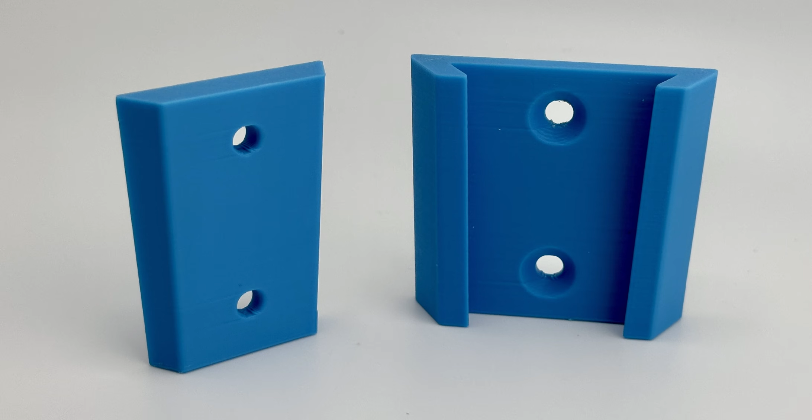In today's video, we are going to do a subscriber request. I had someone comment on one of my last videos that he needed help making a sliding dovetail, and the type he's talking about is one that locks. The dovetail itself is tapered, so he can use it as a wall mount. There'll be a female piece and a male piece, and they slide together and lock together. That's what we're going to make today.

It's pretty simple. You just need to know a few tricks, and we'll take you through the basic steps, and then maybe we'll try to finish it off with some screw holes and stuff like that. So let's get started here.

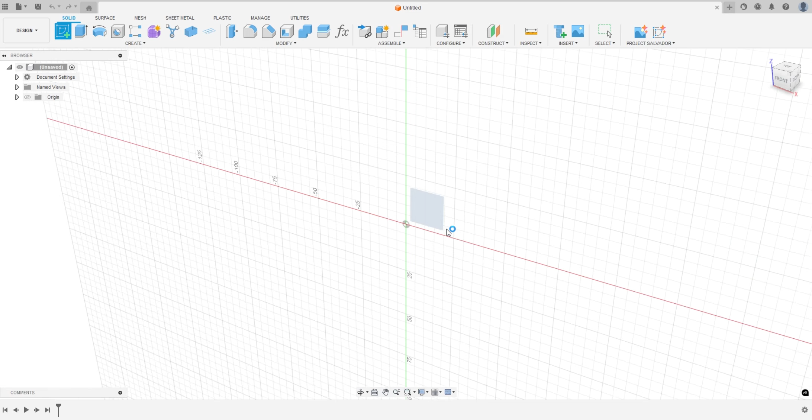The first thing we're going to do is create a sketch on this front plane, and we're going to drive this entire model with just one sketch. There's many ways you could go about making this model, but this is just the easiest way I could think of. So let's hit R for rectangle, and I'm going to do a center rectangle.

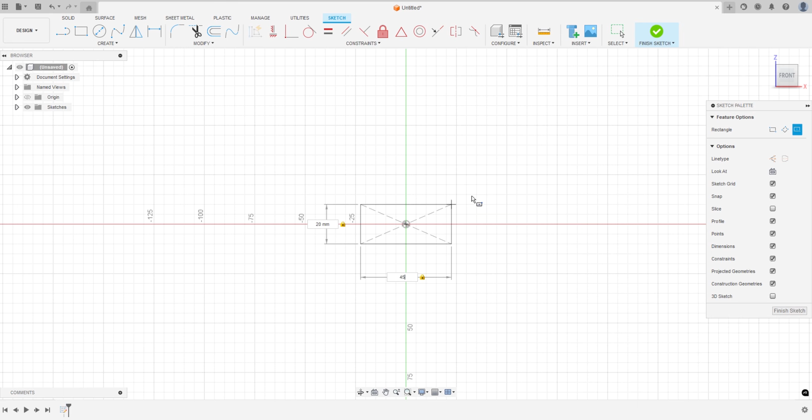We're going to click on the origin, and we're going to cut this rectangle in half, and I want each half to be about 10 millimeters thick. So I'm going to make this 20 by maybe about 45. We'll go 50, so about 2 inches.

Then I'm going to draw a line. So L on the keyboard for line. I'm going to snap to my center point, which has that triangle show up. Click, drag, and click at the other side. So now we have two rectangles.

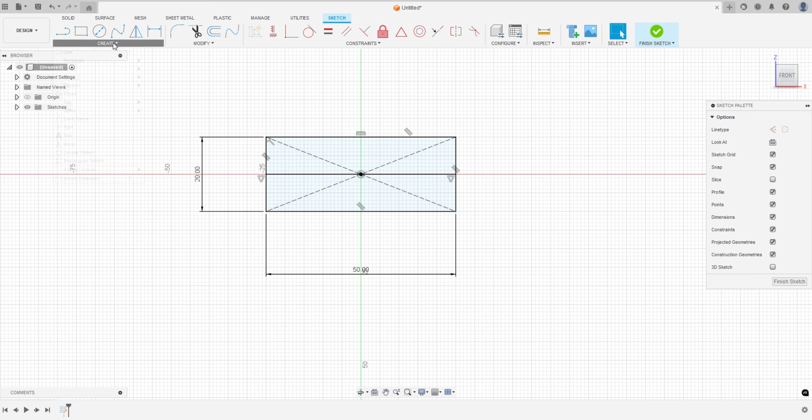Now there's a few ways you could do this. If you don't need to be very precise, because the next thing we're going to do is basically make the profile, the dovetail shape here, you could just make a triangle. So you could go up to polygon, pick one of these, click somewhere in here and hit tab for the sides. It says 6 right now, and you could go to 3.

We'll turn this way, and you could literally just drag this out however you wanted it. And honestly, that looks pretty good. So I just might do this.

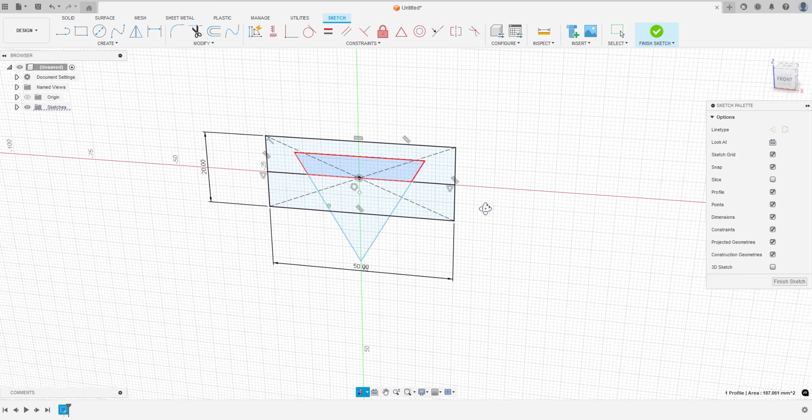So now we have this nice dovetail shape, and we don't have a constrained sketch, which normally for such an easy model I wouldn't worry about, but you should get in the habit of constraining your sketch, because any unconstrained sketch always slows down Fusion, especially if you're going to do complicated models.

So that's pretty much it. Here is our entire sketch. Now there are lots of ways you could have drawn this sketch, right? We're basically looking to have 2 rectangles and then really a dovetail on the one side. This rest of this triangle right here, we don't really need.

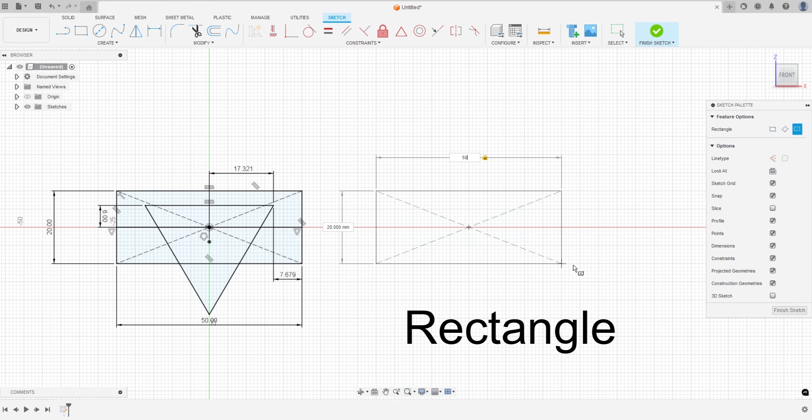If you wanted to have more control, you could do it a different way. So let's just say we redraw that square. I'm going to draw this line down the middle, and then I'm going to draw another line. First, I'm going to hit X on the keyboard to make it a construction line. And we could have just drawn our dovetail, or at least half of it.

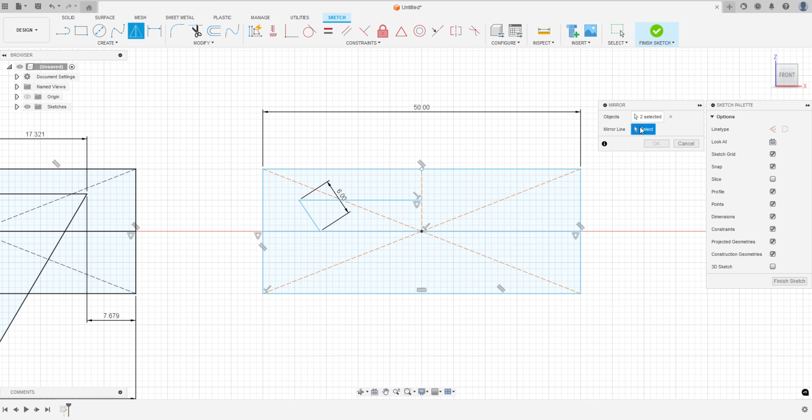Let's say we wanted to make a line like this, and we wanted it to be 6 millimeters here, and it doesn't matter what angle. Let's say we just wanted it to be this angle. You could type in your angle. We could draw that line here, and now what we could do is take this and mirror it along this middle line that we did. Okay, and now we have a dovetail drawn like this.

So like I said in the beginning, there's lots of different ways of doing things. I'm just doing it really quick, which is why I chose to do this triangle, because it's already got the angles and everything. But just know that you can draw the sketch really however you want.

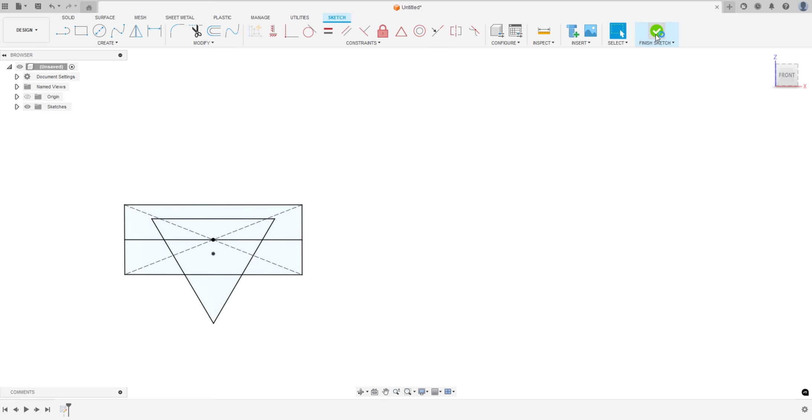So I'm just going to delete all this, and let's finish sketch. Okay, so we've got our sketch here, and the first thing we're going to do is select the entirety of that bottom rectangle. I'm going to hit E for extrude, and let's just extrude it, I'm just going to type in 50 millimeters and hit OK.

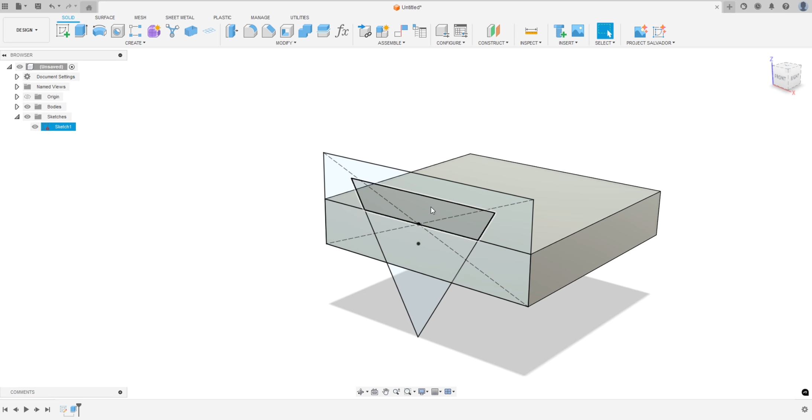Now this next step is really the hardest part, the part of making this dovetail, and that's extruding the dovetail itself. So I'm going to select that profile, hit E for extrude, and just click on the back of this. That just tells Fusion to extrude it to this surface.

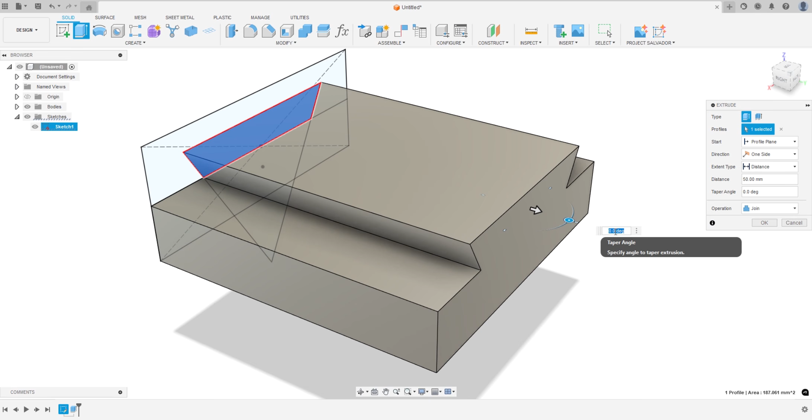And now before I hit OK, what I want to do is taper it. If you look at this window here, there is a taper angle. You can also do it manually with this little handle right here. So if I click that handle, I can either drag it or just type it in. So I'm just going to type in 1.5 degrees, and maybe let's go 2 degrees.

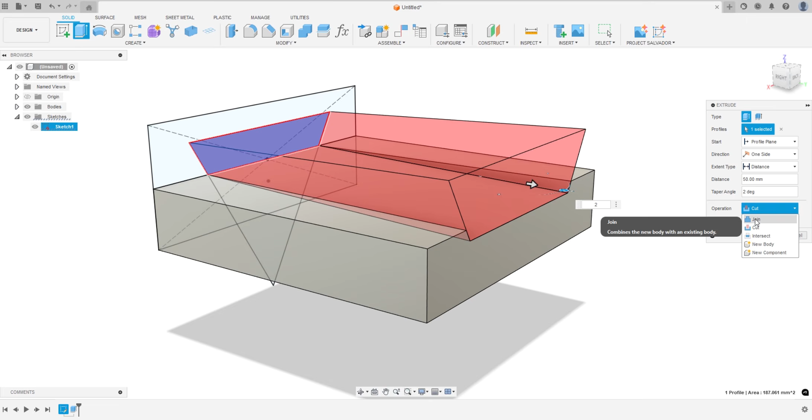And now you see how it turned red. That's because this side got bigger. So it extruded here and it tapered at 2 degrees. The reason it turned red is because it's digging into this other solid body, and we actually want to join this. So we can hit OK.

Now if I toggle off this sketch, you can see we now have a nice taper. Let's get our camera view. So now we have the small side and the large side. And now we need to create the other half of this.

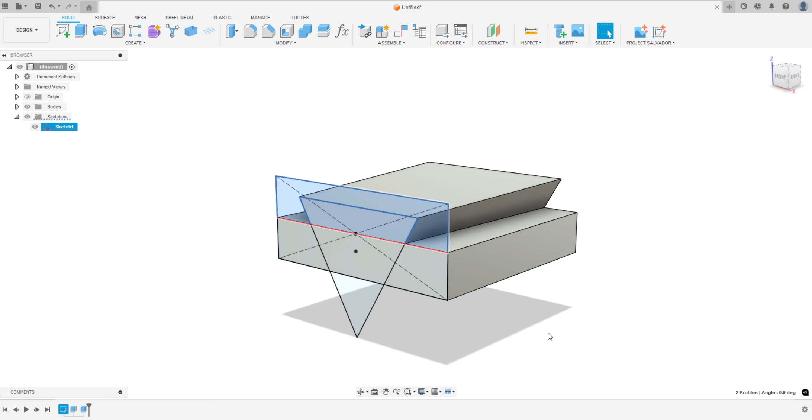So let's turn that sketch back on. All we need to do now is select the entirety of the top rectangle, hit E for extrude, and we're going to click the surface again. You notice it's trying to cut because it's running into that solid body, but I'm just going to go to new body and hit OK.

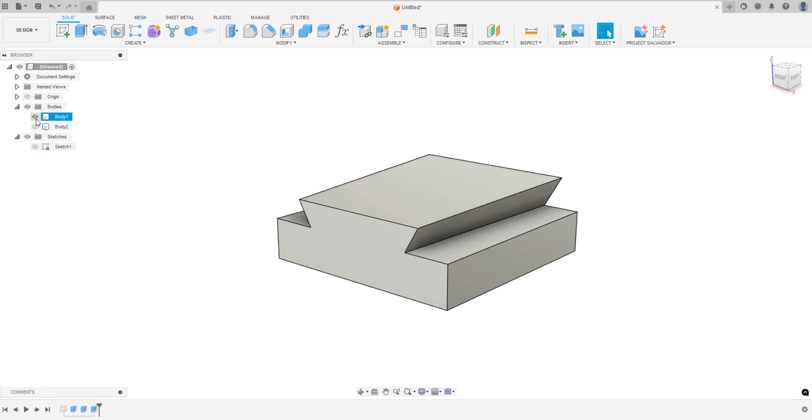Let's toggle off this sketch. So now we have two bodies. We have the first body with the dovetail, and then we have the second body that is just a box right now. So what we want to do is cut away this first box from the second box.

So we're going to do that with the combine tool, and we want to make sure operation is set to cut. The way to think about the combine tool, you've got a target body and a tool body. I really don't know why it's called combine—they really should change this name because you can join. Combine isn't even one of the operations; it's join and cut or intersect.

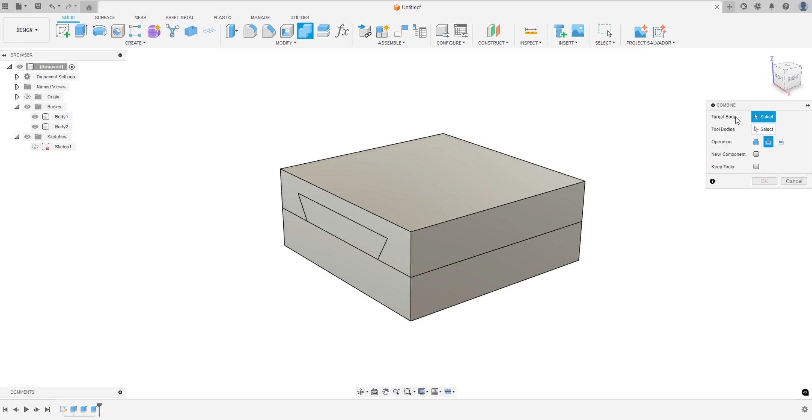What we want is cut. The way to think about this is the target body is the body you want to do something to—you want to cut away from something of that body, or you want to add something to that body. So the target body is that box. The tool body is either the cutting tool or the joining tool—this is what we're joining or cutting away from the target body.

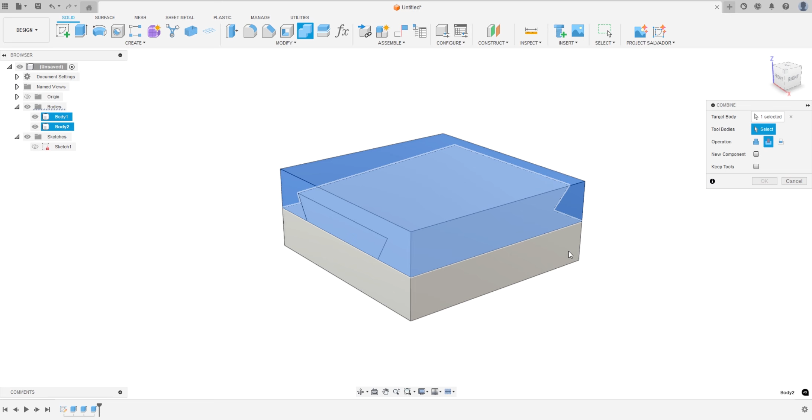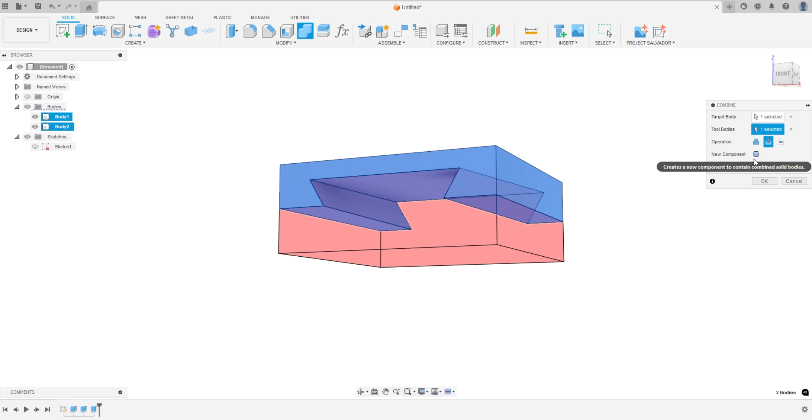So we'll select the tool body here, and it gives you a little preview. The tool body now turns red because red always signifies that it's cutting, and you can see the preview of it cutting into that box. The thing about the combine tool is it gets rid of the tool, so unless you check this, the body right here will disappear. So make sure you keep this checked unless you obviously don't want the tool.

So we'll hit OK, and now you can see we've got our two bodies. We can hide that first body, and there you can see it cut away from that second box we made. So that's pretty much it for the sliding dovetail.

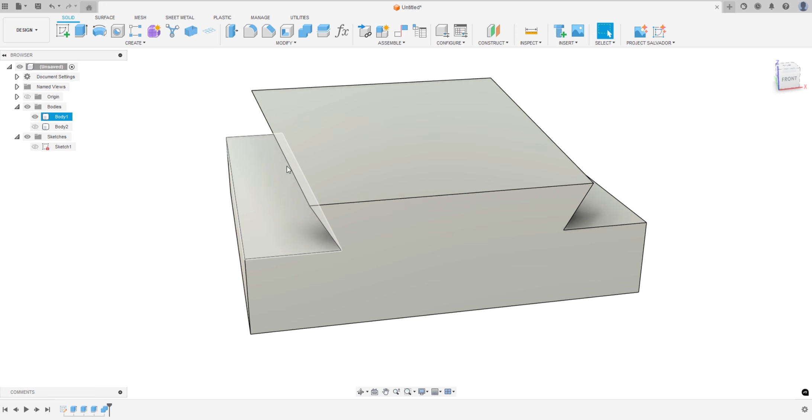The only thing you really want to do, that you really have to do, is taper these edges right here, because when this 3D prints, it's not going to print a nice sharp corner.

It's going to kind of be rounded and bulged out a little bit. So we want to make sure we go up to chamfer, maybe chamfer by like 0.3 or something, just enough to knock that corner off, so when this is sliding we've got some space here.

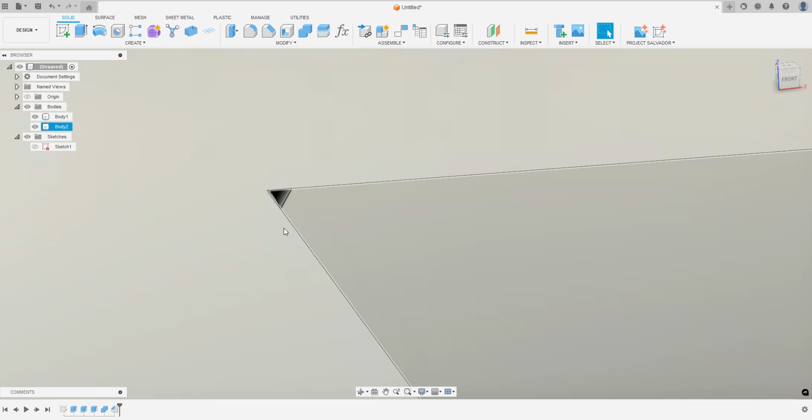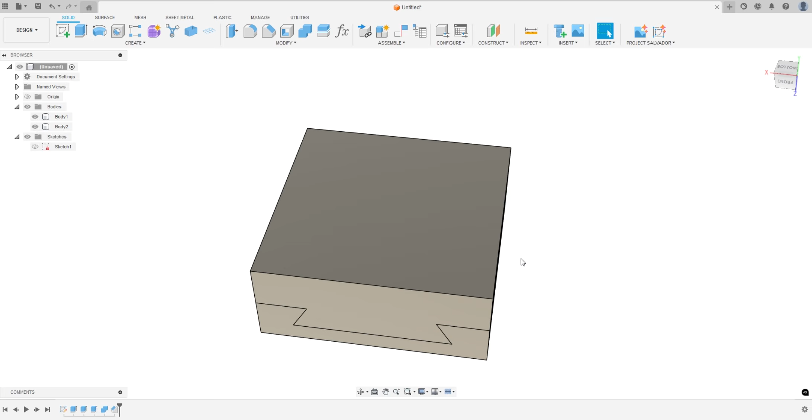The other thing you might think you need to do is actually create some clearance in here, but let's see if I can do this right. That's the big side, but let's see if we can figure this out. If I get my orientation correct - sorry. So like this, I'm going to hit move, and we're just going to move this body.

So you can see as this starts to slide in, it's got tons of room right here. As I slide this in, there's lots of clearance, and then that clearance closes till it gets to the end, and then it's a super tight fit.

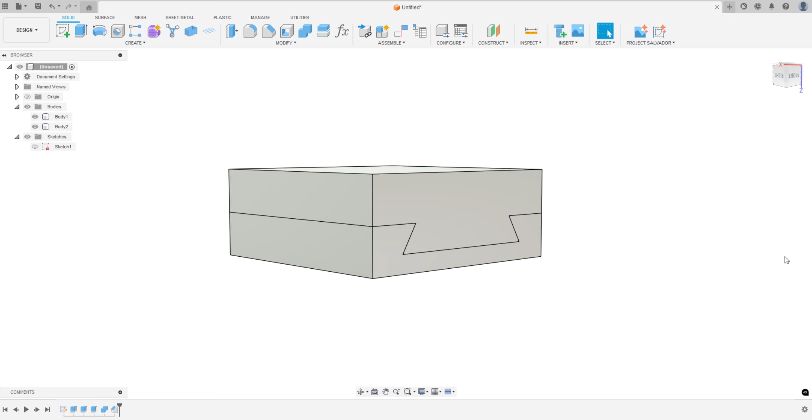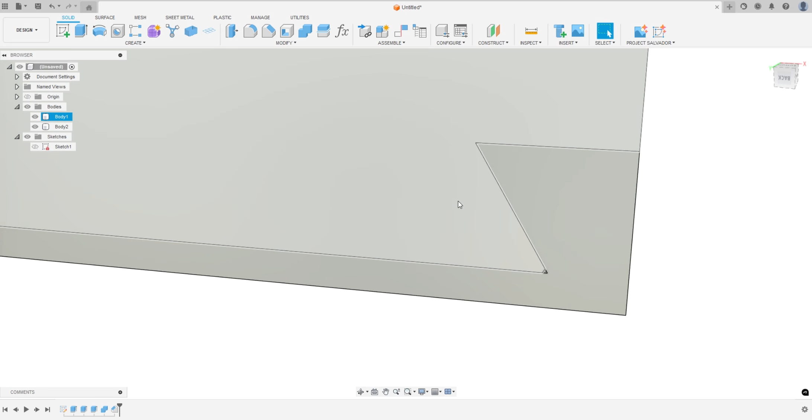So you don't really need to add any - oh, you know what, we may want to, I was just thinking we need to maybe chamfer this too, but the reason I'm not doing that is because we're going to finish this model a little bit. If you were going to keep this as a block like this, you'd also want to chamfer this edge. But enough talking, let's just keep moving here.

Okay, a few things we want to do. So this is the wall side, this is the top - let me get my orientation right here. This is the top. I don't really like how bulky this looks. I kind of wish this was angled or chamfered at the same angle as this.

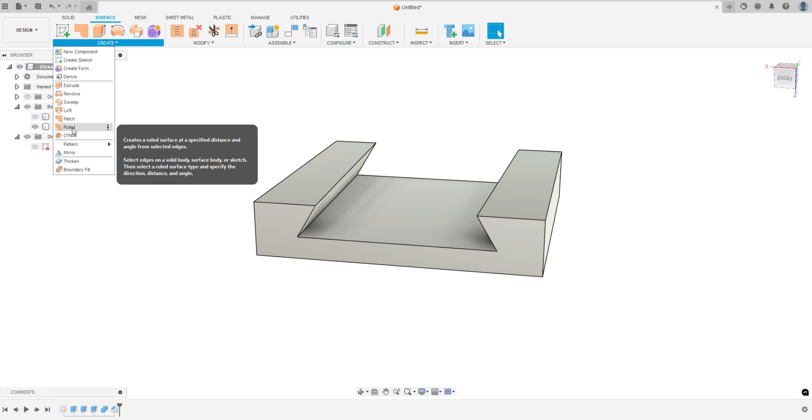We can do this in a really simple way that you might not think is obvious. You can go to Surface, and there's a thing called Ruled - I'm sorry, we're going to do Offset. Basically it's a way to offset surfaces. So I'm going to click on this one and this one.

And we're going to just drag this out maybe like 5. I think that's probably okay. And then we're going to hit OK. Now we're going to use these surfaces that show up right here, these surface bodies, to cut away from this body.

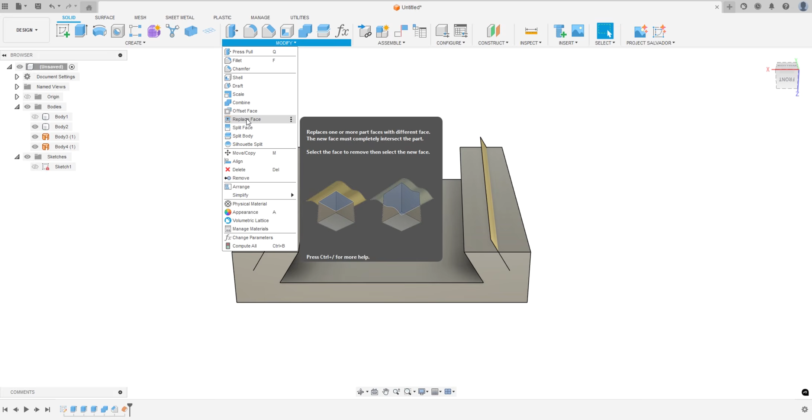So let's go back to the Solid tab. We're going to go to Modify, Split Body. So we're going to split this body, and our splitting tool is going to be this and this. And then we can hit OK.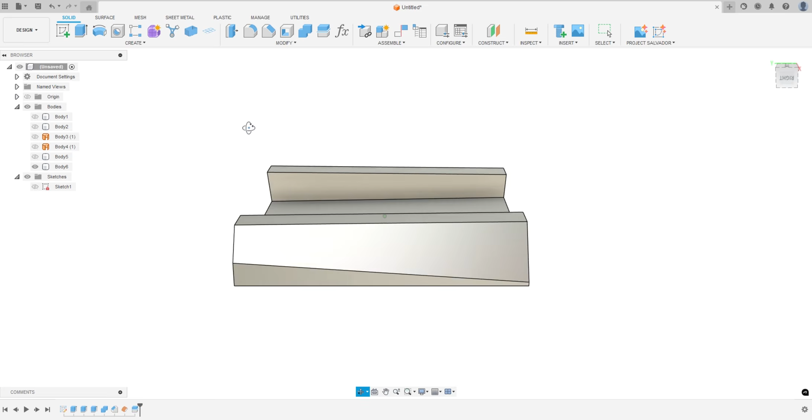And now we should have some extra bodies here. Let's figure out which is which. So this one is that side we cut. We can hide the surface bodies here. So now we have a cutaway that actually follows the chamfer, or I guess it follows this edge.

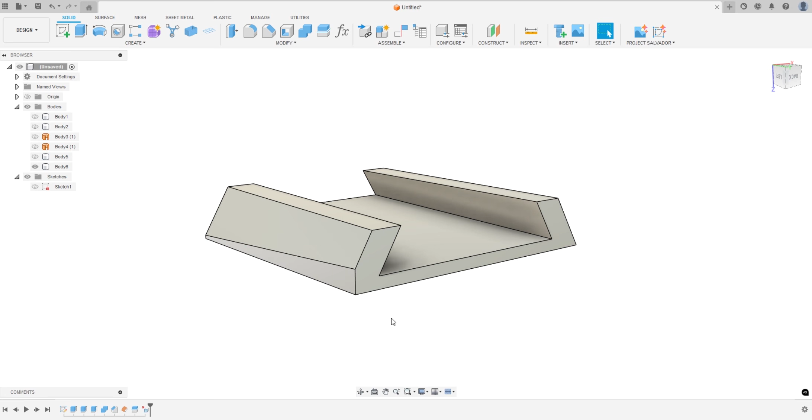Now we are left with kind of a funky edge here. This isn't the best practice, but you can actually just, as long as you're on the Solid tab, click this edge and hit backspace or delete, and Fusion will just fix that for you. It's not great really to do that on complicated models, but that's a way to just quickly get rid of that.

And maybe we want to just add a little thickness. So I'm just going to hit E for extrude and maybe extrude down like another 2 millimeters or something. Okay, so let's call that good for now for this part.

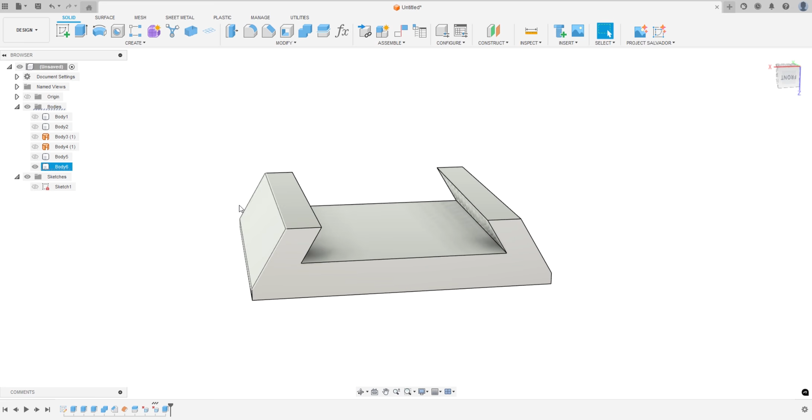Let's go back to the top. And first, let's do some cleanup. We're going to just hold Shift, click this body and this body, right click and remove. That's all that extra stuff that we don't need anymore.

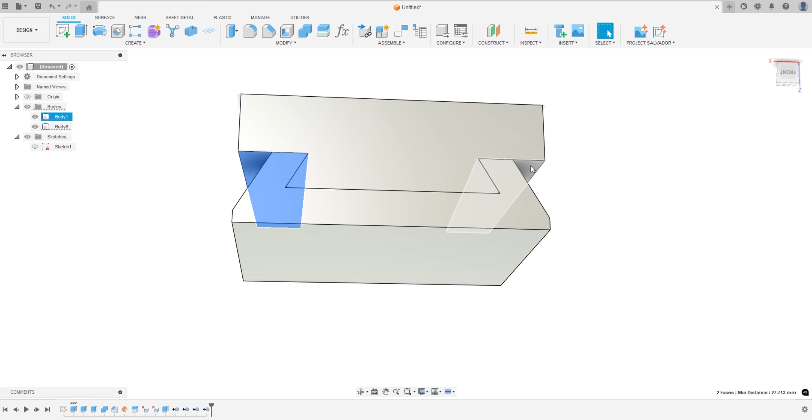So let's turn this body on. And we don't really need these big overhangs here. So I'm going to click on this surface, hold Shift, click on this surface, and I'm going to hit E for extrude, and I'm just going to drag that up to get rid of it.

And now let's see the distance here. So I'm going to click this, and we have a distance of 10 millimeters. So let's just extrude this down 9.5.

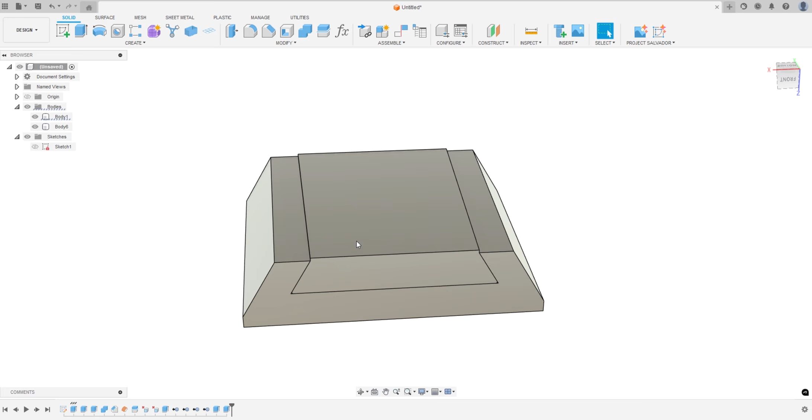That gives us about a 0.5 millimeter gap here so the parts don't rub. Whatever you attach this to doesn't attach to the wall part. Okay, that's looking good. What else can we do to this thing? Some screw holes. Okay, let's get out of here.

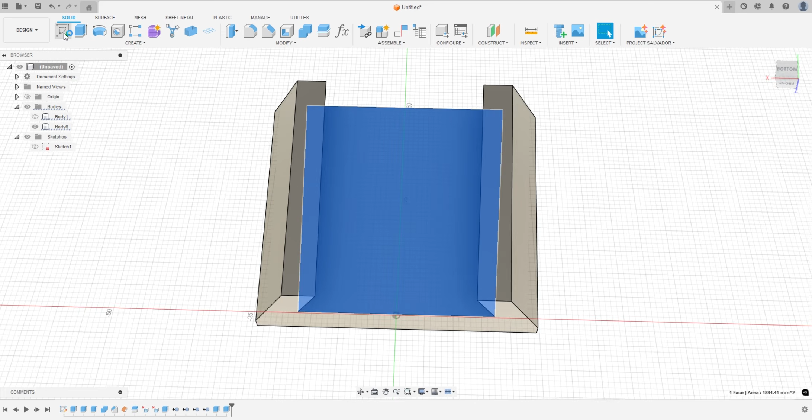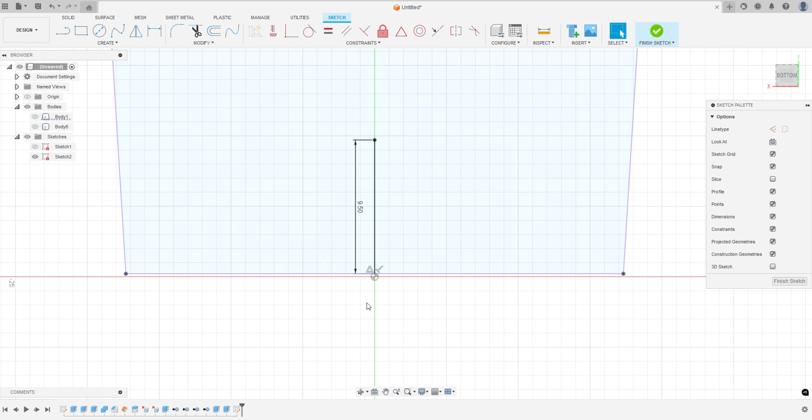Let's draw a sketch on this surface. I'm going to hit P for project, just to project that surface onto my sketch. If I hide my body, you can see we've got that surface projected. I'm going to hit L for line, and come down maybe, let's go 9.5. We'll do another line, make sure we're at 9.5. I'm making this up as I go—you can do any of this how you want.

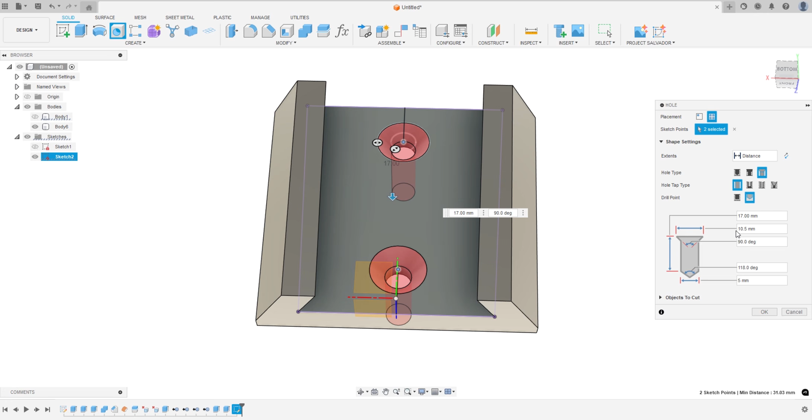Let's turn that body back on, and we're going to create some holes on these points that I made. Obviously, those are way too big. Let's change this to maybe a 5. Let's do a countersink, and we'll change this to 10.5 and hit OK. Of course, this will depend on the size of your screws.

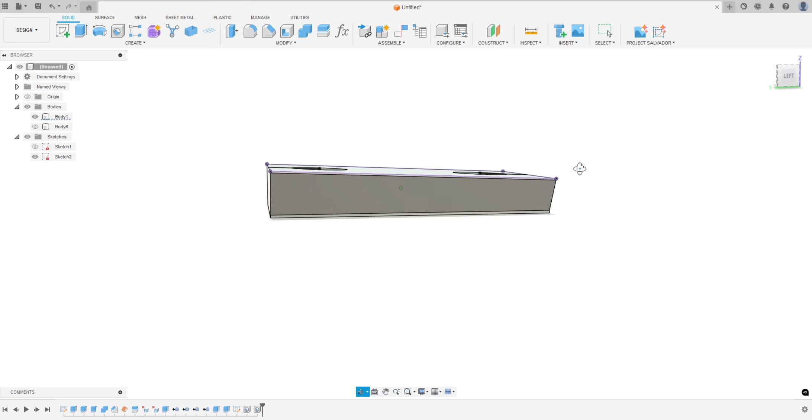And we can use that same sketch to do the same thing on the other body, so we can do more holes. It should save our hole size. Hit OK. So remember, this will get attached to your part that you want to hang on the wall, and this gets attached to the wall itself.

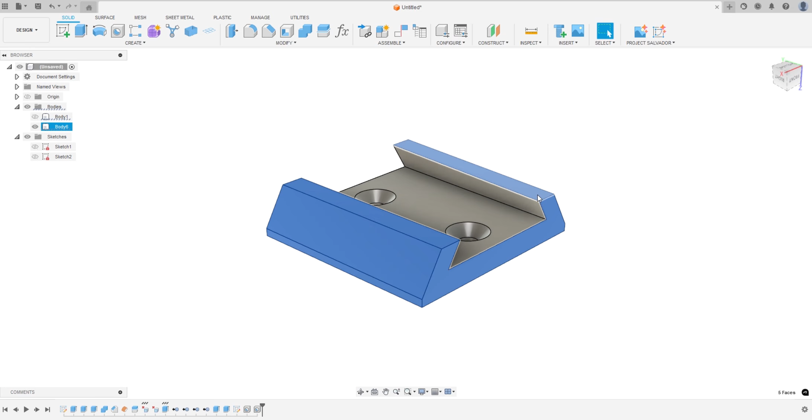And there you go, there's your sliding dovetail. Now, the only thing you might want to do here is chamfer some edges and stuff. So I guess I don't necessarily want to chamfer this edge, but let's just see what it looks like.

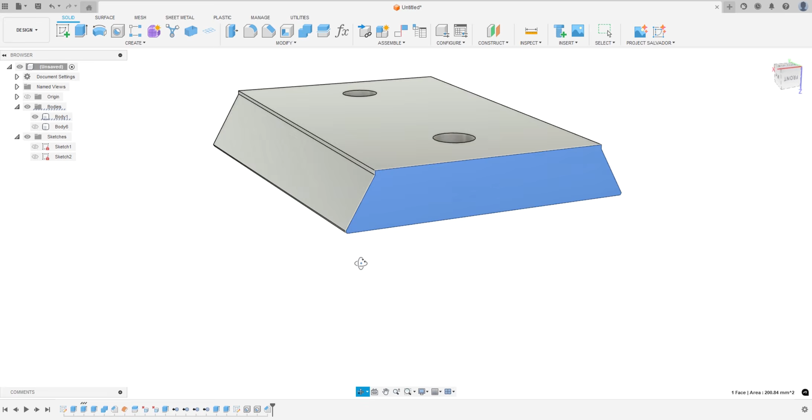You always want to make sure your edges are—I like to chamfer with like a 0.2 millimeter, just to knock off those sharp edges. We don't need to chamfer this inside. And then make sure you're not chamfering things that are going to cause problems with your mechanism or how it moves.

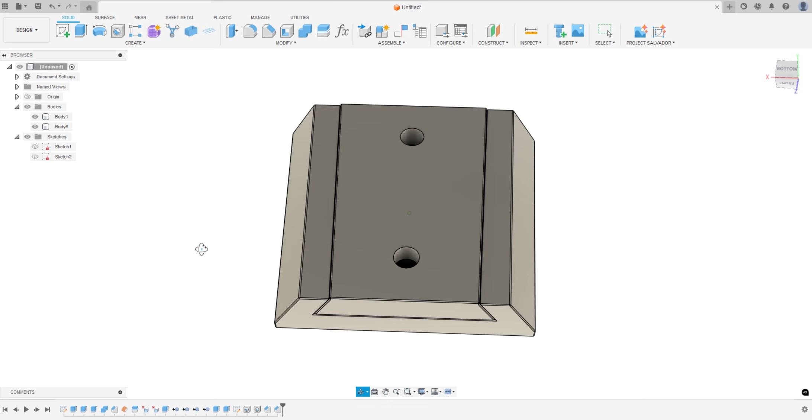So let's do a 0.2 here. I think that's probably okay. All right, well, I tell you what, I think that looks pretty good. Let's just do another—let's move this, M for move on the keyboard, and we'll just drag this up, and we'll drag it back down.

Okay, I tell you what, I'm gonna go ahead and print this. Actually, I'm just gonna bring this into my slicer to show you something. So we're gonna just right click up here at the top of the browser. If you have this saved, this will be unsaved—that's the name of your saved document right here. Just right click on this and go to save as mesh, and anything that is visible.

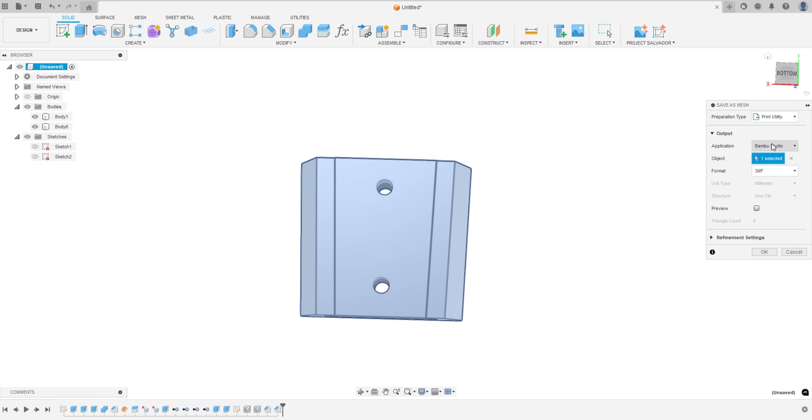So if any bodies or components that are visible will be brought into Bambu Studio. The preparation type is the print utility, which is Bambu Studio. I'm gonna do a 3MF and hit OK. Okay, so let's take these apart and let's automatically set these down. That's how you would think you would want to print this, right? Because there's no overhangs. I got this new Bambu PLA Tough—I've been really liking this stuff.

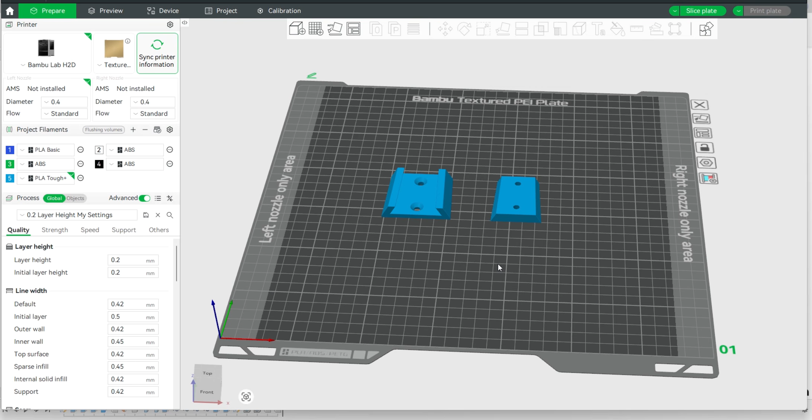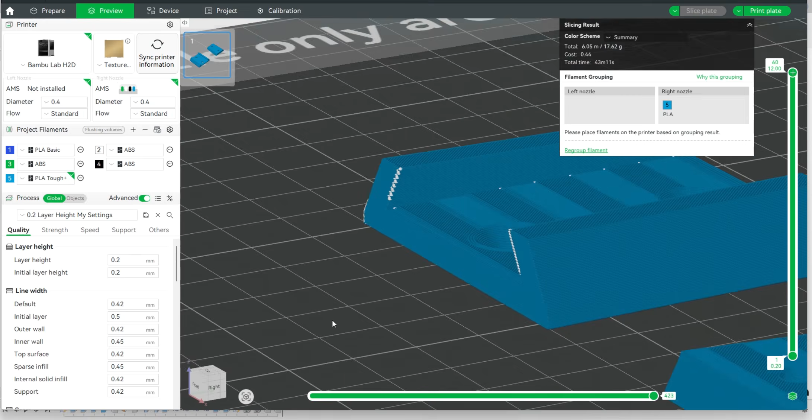So let me show you the problem of printing it this way. Now remember, this side and this side mesh together. Really, let's slice—there's too many things going on. Now look what happens: since this isn't a flat surface, you get these little print ridges in here, which is going to leave a really rough surface.

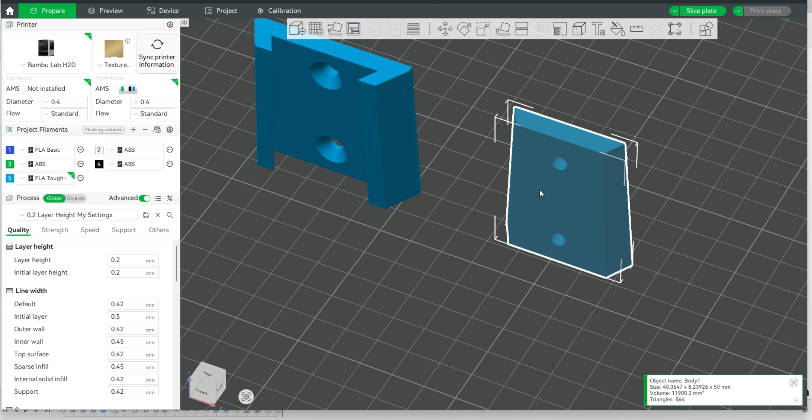Same as this. So when you're printing something like this, you really want to make sure that you are printing upright, like this. Now, when you hit print, I'm going to just slice. Now these mating edges, which is this edge and this edge, are nice and smooth. I think you do lose a little strength this way, but as long as you up your walls and maybe up your infill a little bit, you should be okay.

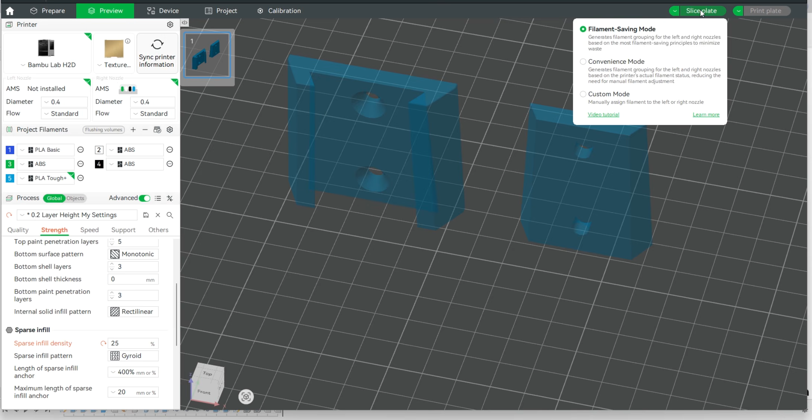All right, there you go. The next shot, I will have this printed and I'll just kind of show you what it looks like.